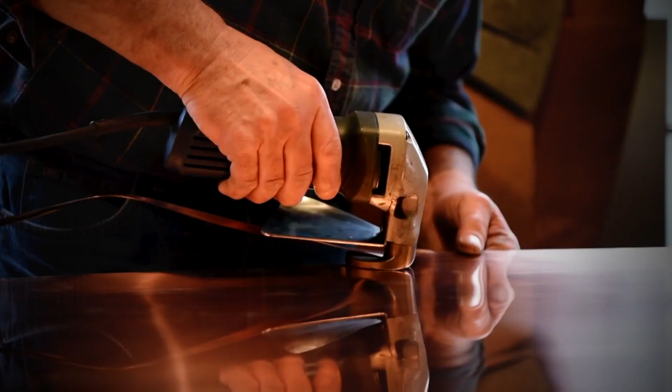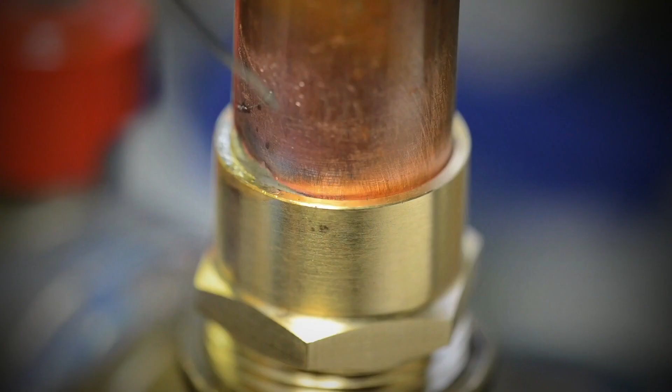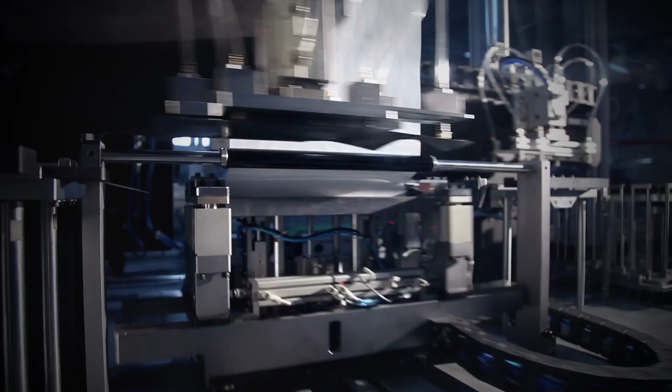The relationship between mankind and the use of metals such as gold, silver and copper dates back to the beginning of time. Despite the passing of centuries, copper continues to be in high demand. This metal and its alloys are essential and versatile materials required to meet the needs of today's society and sustainable cities. The upswing in emerging technologies means demand for copper is expected to continue to rise. This entails challenges that must be faced by the extractive and processing industries.

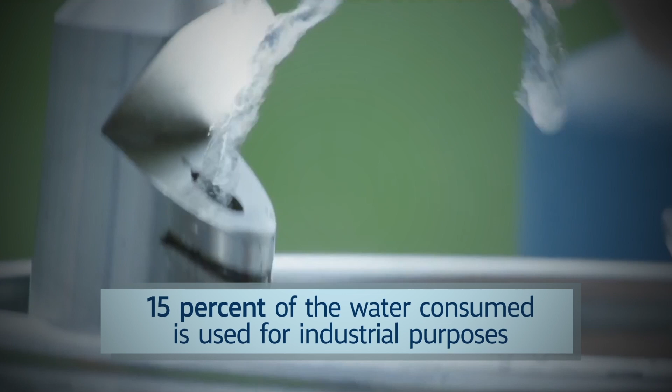Every year, about 15% of water consumed is used in industry, including copper foundries. In addition to high costs, there is concern about water scarcity and overexploitation of aquifers in Europe. Backing the future and the environment. Companies like Atlantic Copper and its partners share this concern. As a result, they have developed RedScope.

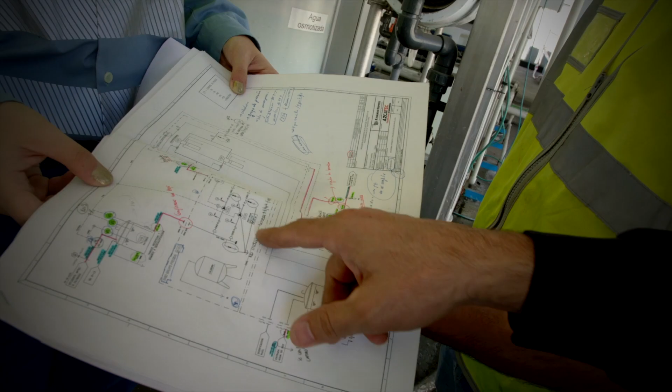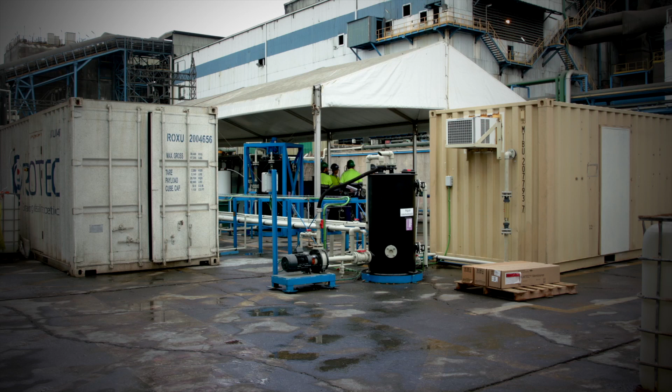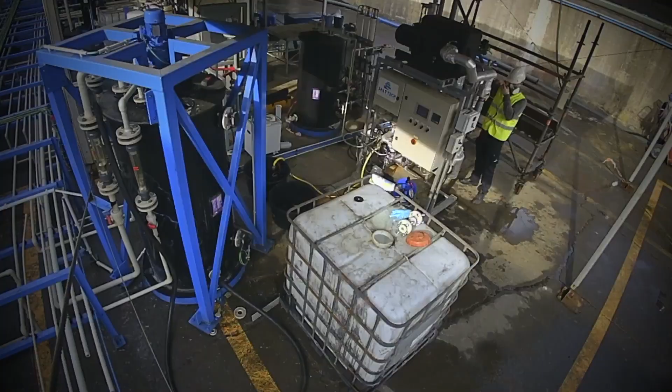A project funded by the European Union through EIT Raw Materials. This project evaluates the technical and economic feasibility of a new purification process, whose objective is to maximize the recovery of liquid effluents in copper foundries and the possibility of being extrapolated to related industries.

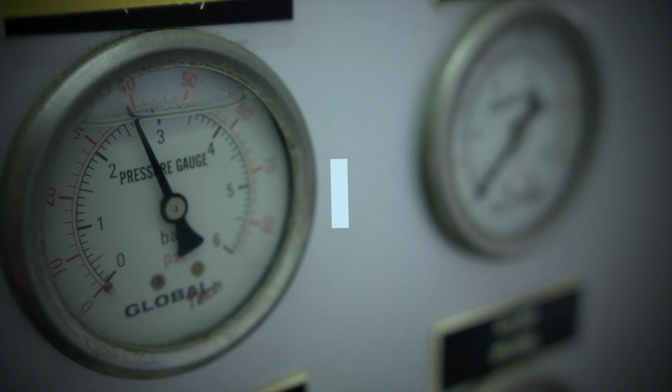The four partners of this project, Atlantic Copper, Grupo Suez, Cetaqua and IVL, form a strong and competitive team in which each one provides their knowledge in the field of business, industry and research. Together, they have already tested and validated an innovative zero-discharge process at the Atlantic Copper Foundry.

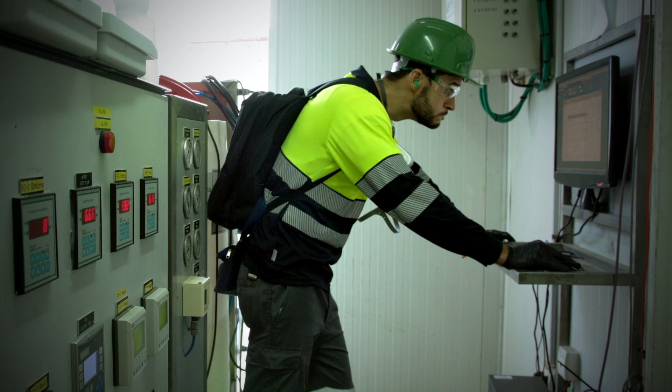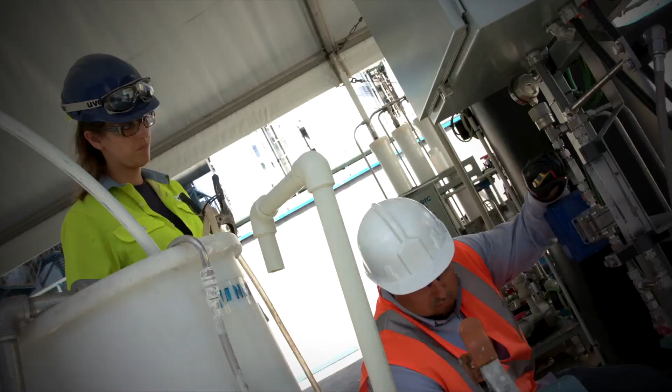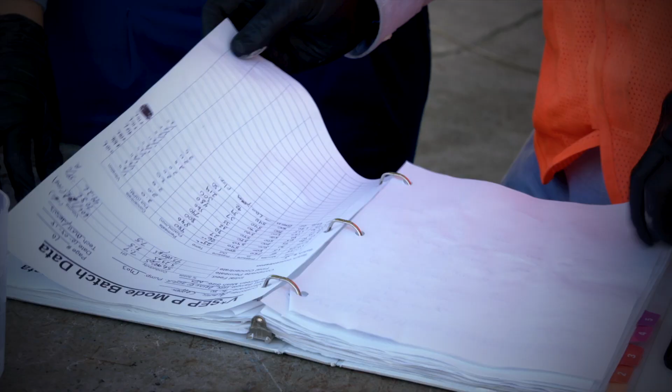Project RedScope. Project RedScope began in 2017 with a preliminary feasibility study, laboratory tests and the search for the most appropriate technologies to achieve these challenges. In 2018, work began on the installation of the prototypes of technologies in a pilot plant at the Atlantic Copper Metallurgical Complex and its operation, the analysis of the operational performance, characterization of the waste, and subsequent selection of the best technologies. In order to work with proven data and that the results could be scaled up at an industrial level, a pilot plant was built in an industrial environment.

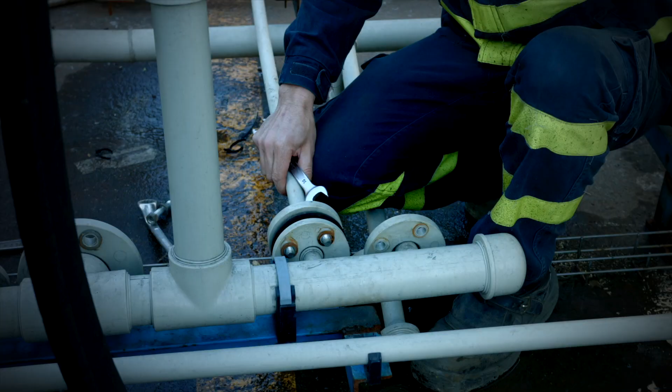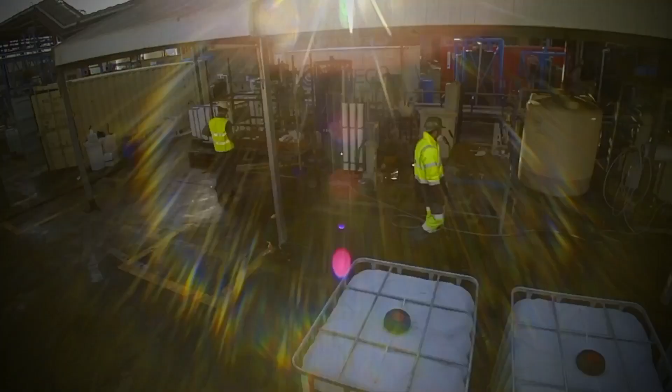The objective of Project RedScope is to analyze the technical and economic feasibility of a new process to maximize the treatment of liquid effluents in a copper foundry. It has taken several months for the installation, running trials and tests and evaluation of data in order to define and validate the best alternatives. The pilot phase has lasted from April 2018 to February of this year.

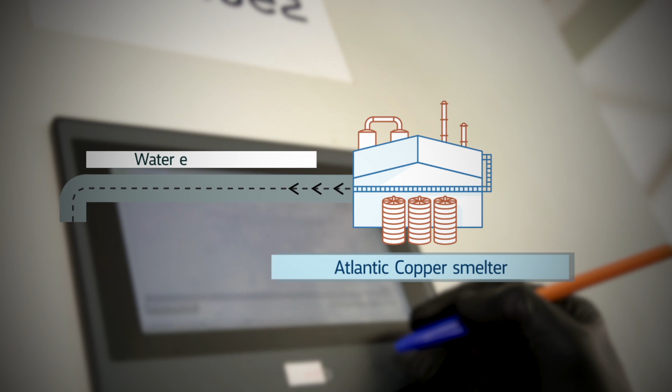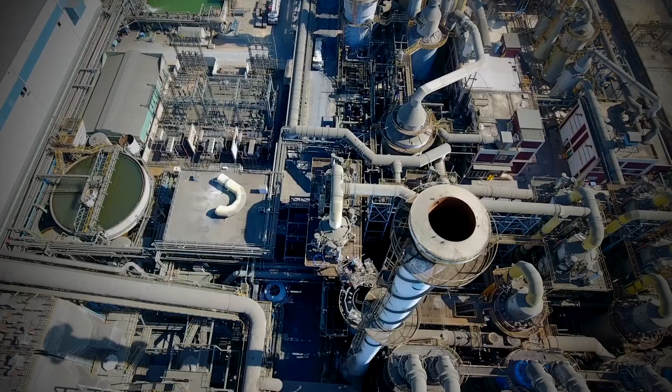How does Project RedScope work? How do we transform almost 100% of liquid effluents into usable water? That is, clean water that goes back into industrial processes in the foundry itself. The water consumed is used in various facilities, where different effluents are generated and are sent to the liquid effluent treatment plant, to be treated by a standard physicochemical treatment. This plant generates a unified discharge that complies with all local regulations and the European Union itself.

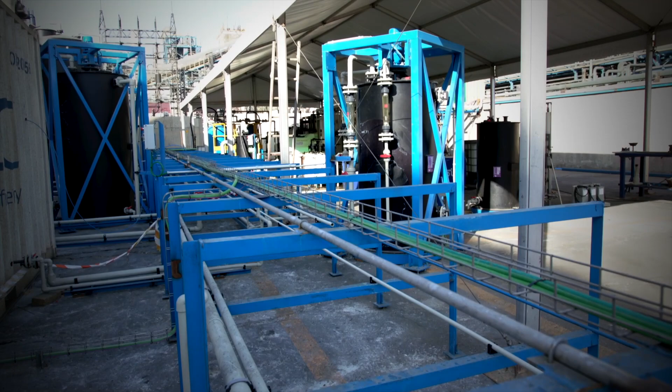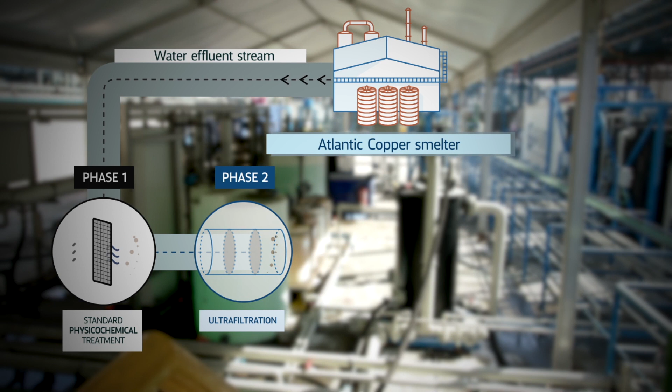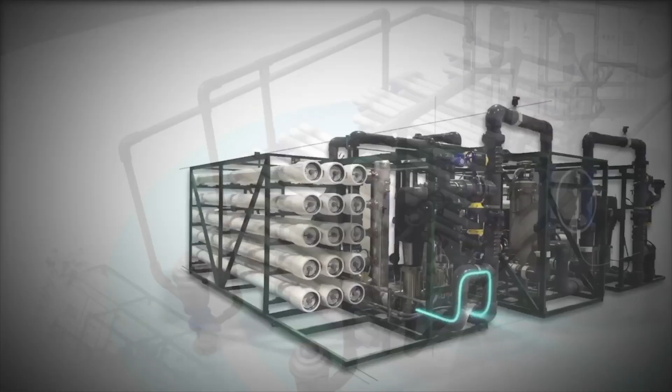Project RedScope begins at this point. The pilot plant is fed at the exit of the liquid effluent treatment plant. Water passes first through an ultrafiltration process, thanks to the design of an advanced filtration prototype. After this, ultrafiltered water undergoes an advanced reverse osmosis process, comparing two different technologies, Rotec and Desalitech.

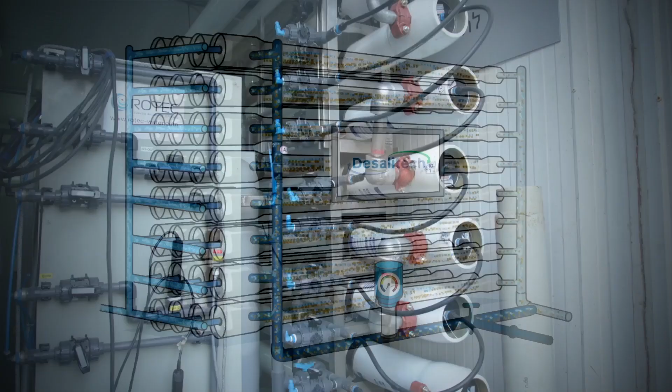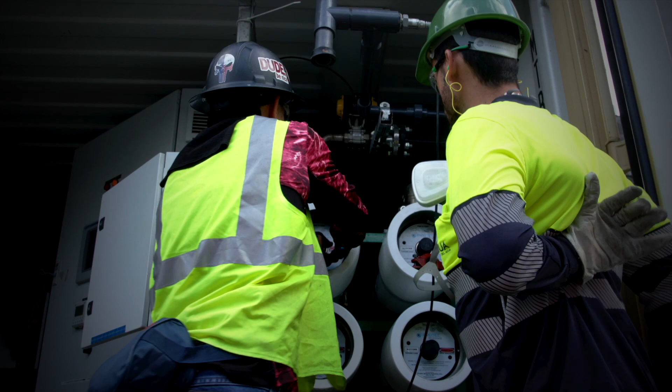Rotec works by causing a flow change inside the vessels where the membranes are housed, which reduces dirt and increases the lifespan of the membranes. Desalitech works by generating a flow of permeate water similar to that of fed water, for which it continuously recirculates the rejection, brine, to the feed until the concentration of the brine reaches a maximum reading or the performance of the membranes falls, thus producing its discharge.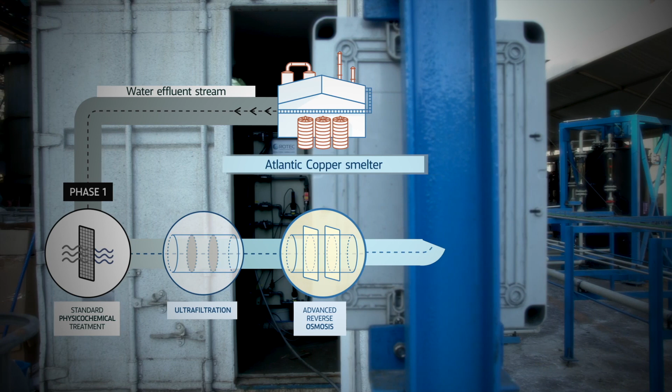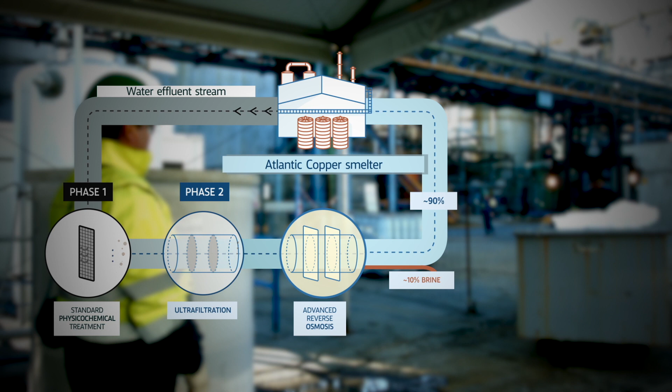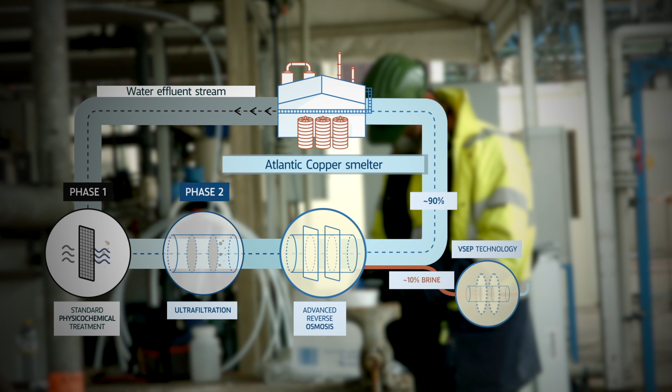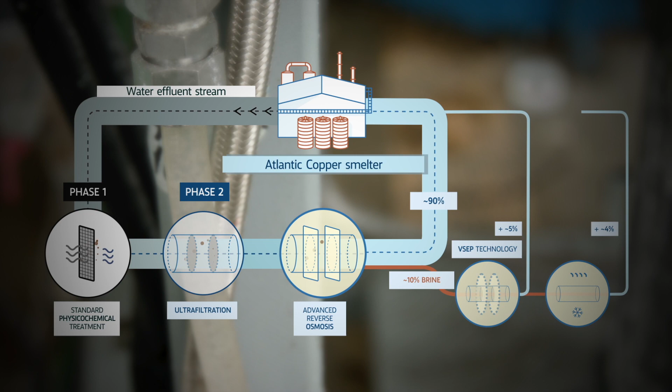The advanced reverse osmosis stage achieved a 90% recovery of clean water. The remaining 10% is brine, which goes on to the next phase with the objective of continuing to purify and recover water. That 10% of water is treated with VSEP technology based on vibrating membranes. Of this 10%, half is recovered as permeate, leaving 5% brine, which continues until the next and final phase, evaporation and/or crystallization, applying SaltTech technology.

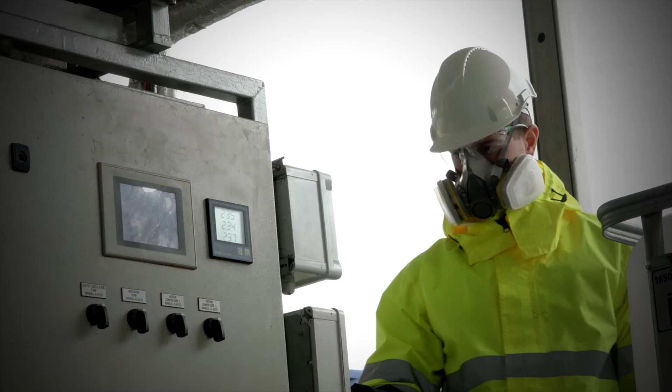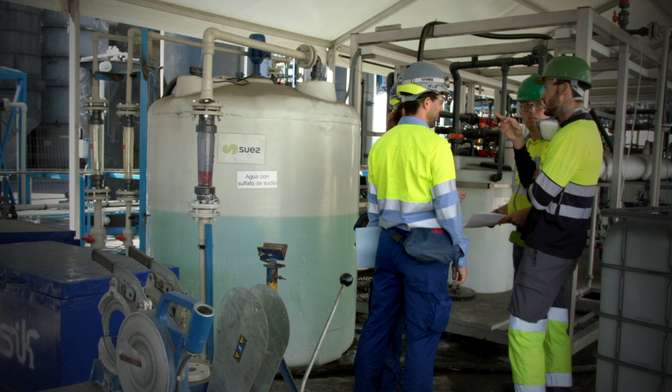SaltTech is a low-pressure evapocrystallizer that reduces electricity consumption, produces permeate and a highly concentrated or saturated brine stream, which is left to rest to obtain salts with a minimum amount of moisture by precipitation, mainly crystallization and/or sedimentation. This 5% that arrived as brine is mostly transformed into recovered water. This way, only 1% of the initial effluent will remain as salts, thus managing to separate the salts from all the impurities contained in the water.

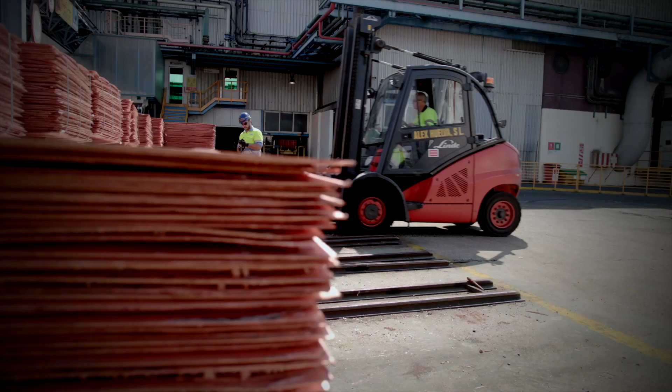This project demonstrates a clear boost to sustainability, achieving more sustainable copper production and guaranteeing the future of the sector. This project, led by Atlantic Copper, allows for optimal use of raw materials in Europe and will contribute to the current strategy of the circular economy of the European Commission.